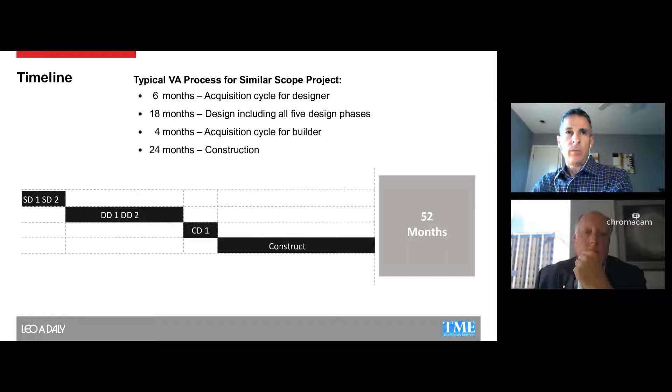So 6 months for the acquisition of the designer, 18 months of design, and then we had 4 months for selection of builder and 24 months of construction. And the actual length for the Omaha project, the donor went through a selection process for the designers, and shortly thereafter went for an acquisition process for the contractor.

So our contractor, this is actually a CM at risk type setup for this project. McCarthy Building Companies was the contractor, and they actually performed more like an early contractor involvement, so they were involved throughout the length of the project from early design all the way through to the end. That allowed for a lot of control of budget, scoping of project, and the potential to get some of the specialty subcontractors on board early. We'll talk about that a little bit.

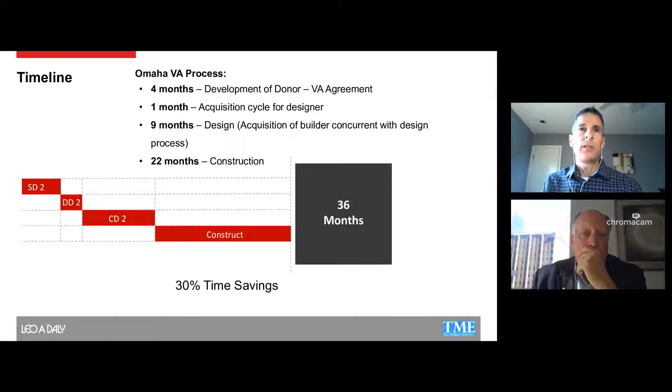Ultimately, that looked at about 30% savings of time overall. So when you look at this project, people are wondering how it fared from a budget standpoint. The reality is it really became a matter of the overall schedule. When we look at that timeline and the primary benefits that contributed to it, we were able to get started early. The elimination of multiple submission points reduced the overall design time, and the involvement of the contractor allowed us to have coordination with specialty subcontractors.

They were not just a straight bid to lowest bidder type situation. We worked with specialty contractors and had some delegated design items. So that early contractor involvement really allowed for constructability reviews, timing, early procurement of items, which ultimately impacted the overall schedule.

The senior resident engineer for the project from the VA was involved in the project during design, so when you were going from design to construction, that senior resident engineer was involved in the project and knew the decision-making process throughout.

So the end result of really controlling that timeline - although there were decisions relative to design that controlled cost - the actual construction cost of this project was $67 million versus an original budget from VA for this project of $86 million. And when there was a conceptual estimate done by McCarthy between program and concept, they set a number just at right below 67. So we ended up being within 1% of the conceptual estimate when we were done.

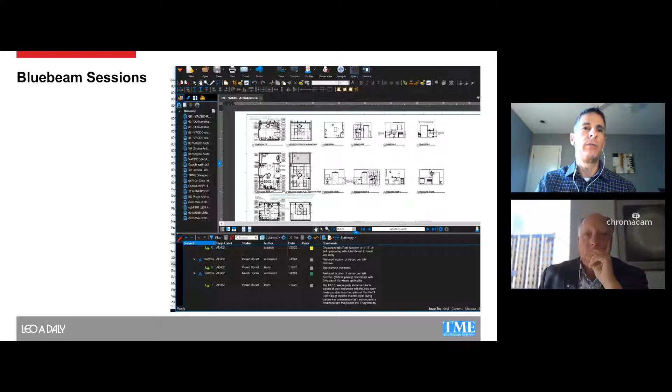At the end of that period, it closed for comments, and as a design team we could generate a report to all reviewers showing the comments and how they were addressed. This was done for each of the primary milestones. We ended up needing a training session with the VA reviewers at the beginning, but since then we've talked with central office VA staff, and the VA is moving towards using this as their primary review tool going forward.

Regarding FGI and VA TIL, I mentioned earlier there was a modification or evaluation of which provided benefit. At the beginning of the project, in addition to modifications to the PG 1815, there was an establishment of the primary codes to be followed, including evaluation of which VA design manuals would apply. For this Omaha project, most VA manuals, other than those for surgery related to med gases and similar systems, were not followed. Instead, typical NFPA guidelines, local building codes, and FGI guidelines in conjunction with VA TIL for room templates, equipment layouts, and room organization were used.

That allowed us as a design team to evaluate with users whether, for a particular room, there was a reason to look at a different setup than a typical VA TIL room, giving us the latitude to do that. That doesn't mean we didn't follow VA TIL requirements—I'd say about 90% of rooms followed typical VA templates. But in some cases, like the women's clinic, they wanted things set up a little differently. So those rooms meet FGI guideline requirements but are not a typical VA TIL template, for example for a women's exam room.

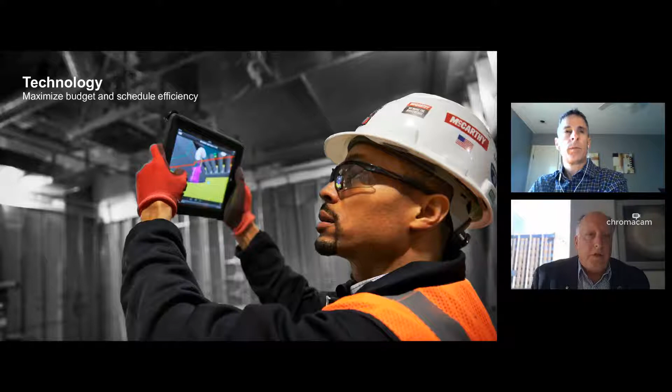So we're going to talk about learning objective 4. We're going to introduce some of the technology used on this project to explore some of the unique aspects of design and construction, but also focus on how the technology had an important positive impact on the budget and schedule. Unfortunately, we don't have McCarthy Construction with us today, but they are the contractor for the project, as Jeff mentioned, and a great partner to the whole project team. A big advantage for this project was that the private sector donors brought McCarthy on for early contractor involvement.

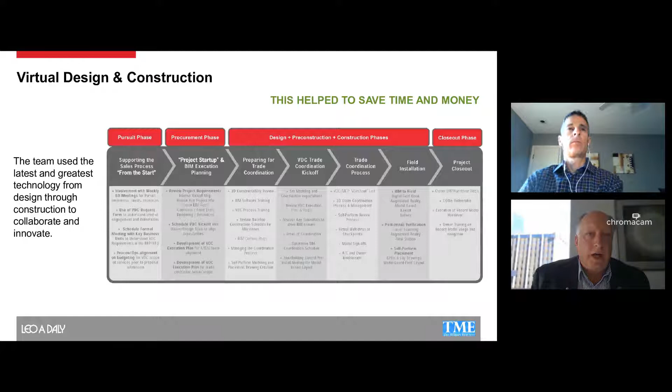That occurred almost immediately after we were hired as the design firm. The ability to get their input during the design process was invaluable for producing an effective set of design documents, while also staying laser focused on the budget and schedule for the project.

One of the things that helped from the start was that we gave McCarthy access to our Revit model, so they could keep abreast of our design progress. Significantly, they were able to do real-time cost modeling based on the Revit model as it was developed and updated day by day. We in turn used our clash detection from the Revit model, and even virtual reality software, to help avoid conflicts of building systems and so forth.

Another benefit of McCarthy having access to our Revit model is that they could do constructability reviews at any given point in time and always have the most recent design documents at their fingertips. This allowed the team to make effective design decisions based on immediate feedback from McCarthy.

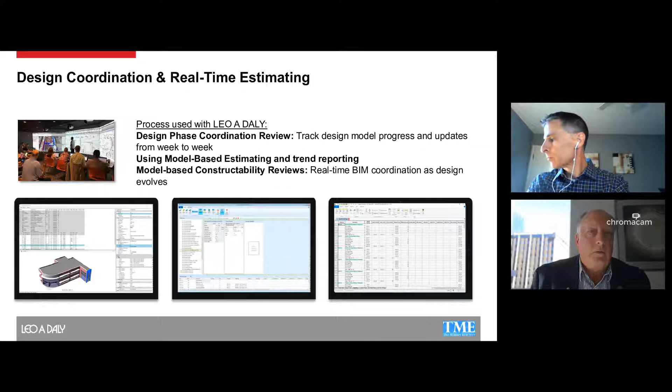Another great piece of technology McCarthy employed was their subsurface utility mapping system. I'm pretty confident no one on this call has ever gotten a set of as-built drawings that were 100% accurate. With a facility dating back to 1950, you're aware there may be surprises along the way. The subsurface utility mapping identified several unmarked utility lines on site, even a buried manhole we would have otherwise been unaware of.

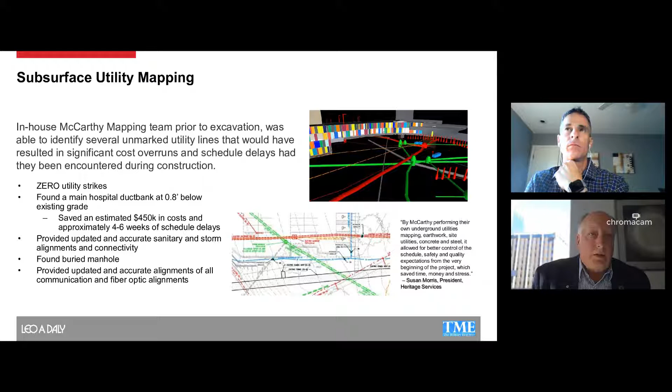Luckily, their process even identified an electrical duct bank less than a foot below the surface. We estimate this essentially saved about $450,000 and at least a month on the schedule by not finding this unmarked duct bank the old-fashioned way.

Another benefit of McCarthy having access to our Revit model is they could do constructability reviews at any given point in time and have the most recent design documents at their fingertips. This also allowed them to coordinate the work with all the trades in a 3D model. Their team utilized drones, laser scanning, and of course the virtual reality tool our team used to help walk the VA clients through the space.

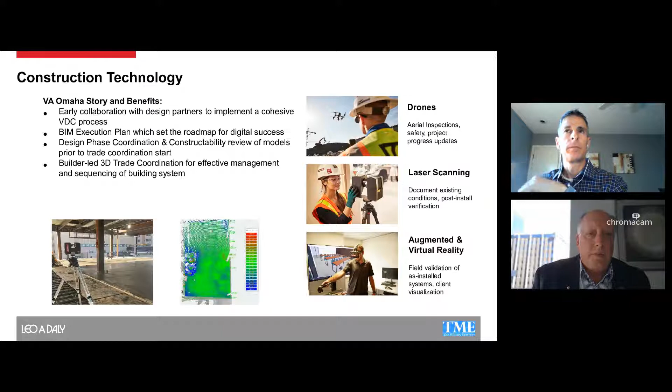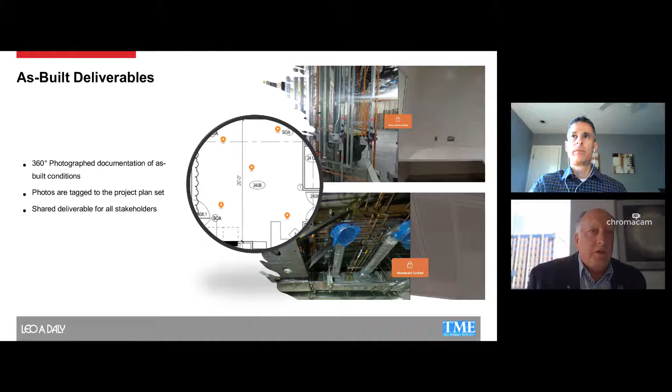There's a question about whether the VA has used the chip-in program elsewhere. When the chip-in project was conceived, it was set up to allow 5 projects under that legislation, and it had a sunset date. Omaha was the only project executed during that period, though the sunset date was later extended. There's a project in Tulsa right now, a renovation of an office building into a hospital for the VA, which will be the second chip-in project. I believe they're looking at extending that further. I think just recently it was approved to extend the Chip-In Act, about 2 days ago, by the House. It still needed to be voted on by the Senate, I believe, because other entities are looking at potential projects there. But of the initial 5 envisioned, Omaha was the only one executed under that initial legislation.

In terms of veteran-owned business contracts, on the design side we were the one consultant hired, along with landscape design; there wasn't a requirement there. I know under subcontracts for construction, there were some veteran-owned small business entities involved with the project, though I don't know what the construction requirements were, honestly, off the top of my head.

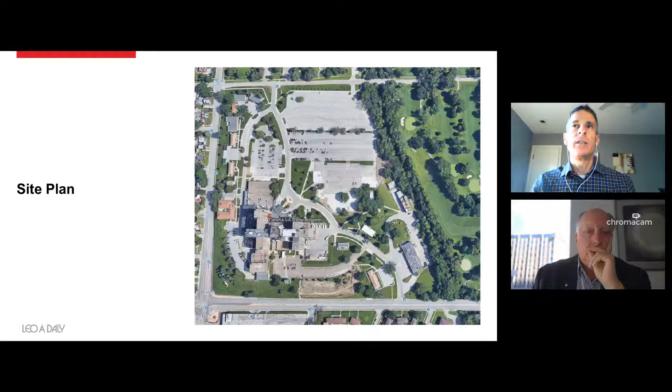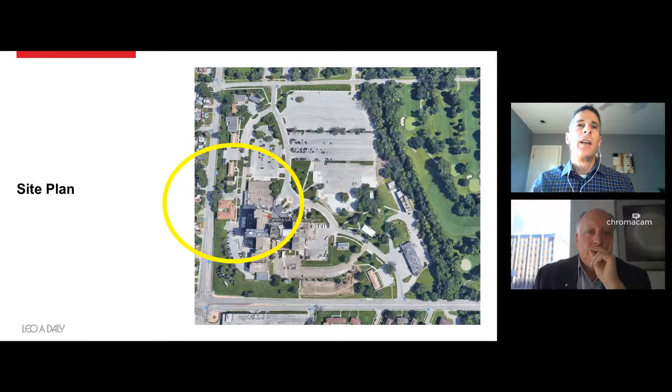The VA hospital building is over here, and the parking lot to the right of that is where this building is going to reside. So this is a site plan and footprint of the new building. It was designed to be kind of the front door for the overall campus.

There's parking associated with that, and there's a separate project the VA just recently completed, a parking garage to the north of this. It was designed to have a connector back to the main hospital, and it's a split connector, so there's a public concourse connector as well as a service corridor connector.

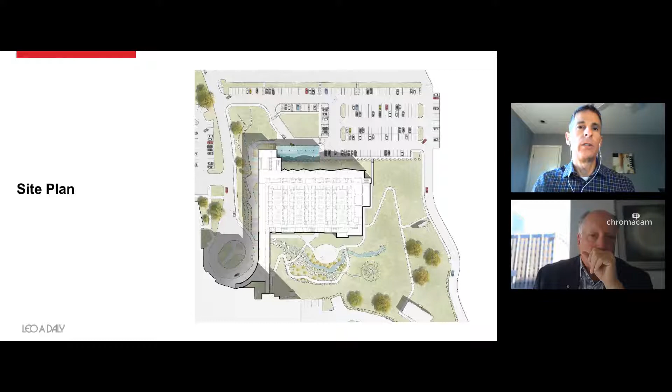The position of this building allowed for connection to parking. It also avoided certain utilities and things in that back area, but it did create some distance back to the hospital. So that comes into play for what the development of that experience was like for the public to actually access the hospital, because this really became the front door for people accessing the campus.

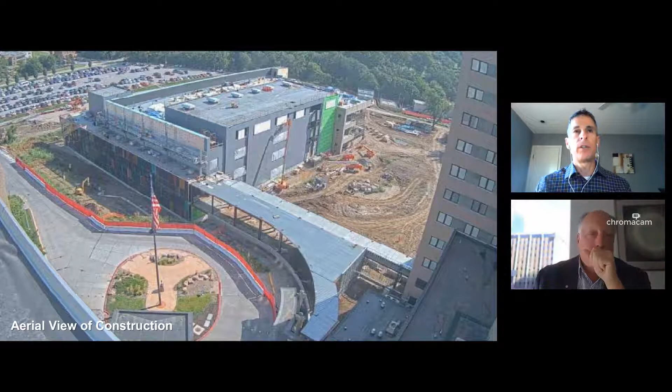Rather than this drive up here that you see in the lower corner, that is the main entry drop-off drive for the hospital. That remained in place through all of construction, and it still is the main drop-off for the hospital. Nearly all the functions in this ambulatory care building are functions that came from the hospital.

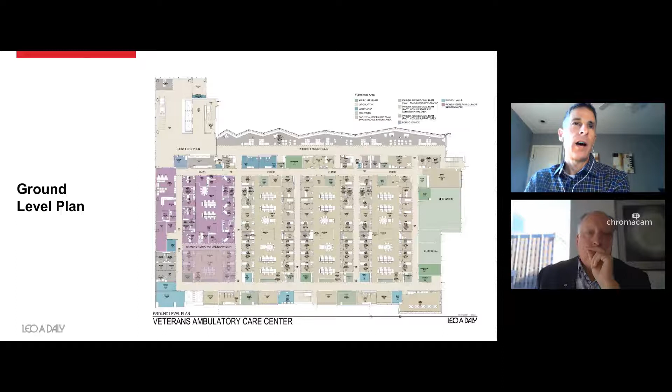So this is the ground level. It is the entry level for this building. In the upper left corner there is an entry lobby area, and elevators and stairs. This building is set up very simply. To the north you'll see that crinkle wall there, we've referred to that as the flag wall, which you'll see in some of the images. All the waiting areas for the 3 floors are against that wall.

And then the clinics, the PACT module clinics, are set up on ground and 1. Very systematic, very clear. The wayfinding and access to these are very clear, as opposed to most of these came from the hospital, where they would all be in different configurations, on different floors. So this became a very systematic orientation for how veterans were to access all these places.

The purple module at the far left is the women's clinic, which was not originally part of the scope of this project. Through design, the donor really wanted to push for that, and we were able to incorporate that under the scope of the project and the budget. So there's a women's specialty clinic there, and then the rest of that floor is general primary care clinics.

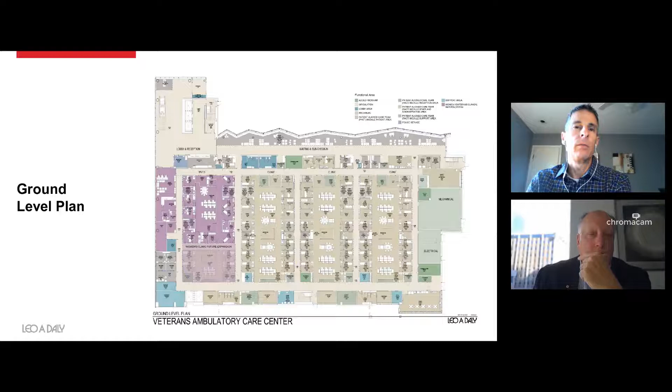Same thing on level 1. This is the concourse connection. So when you come up the primary entry stairs, this concourse connects all the way back to the hospital.

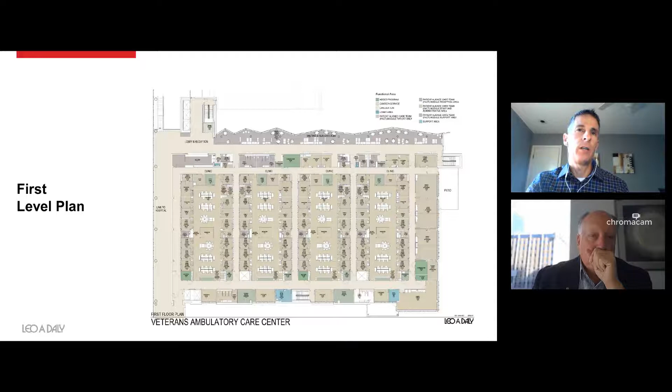It is in a split corridor, so you have a service side and a public side. There are service elevators on the lower left here on the back. This building very much operates in an on-stage, off-stage approach, where all your patients feed from the north side. There's patient corridors, and then there's a service back corridor and service access to all the clinics for the staff.

The top floor of this building is a specialty care clinic, and then the rest of the floor has radiology and an ambulatory surgery center. So you can see the operating rooms on the far right side. Prep recovery zone is in the middle of that floor.

And then that back corridor to the south of this drawing, the bottom of this drawing, is your service corridor that connects to those service elevators so we have the ability to get supplies to surgery. The connector back to the hospital is designed to be able to house a second floor, should this floor be something that wants to connect all the way back to the hospital in the future.

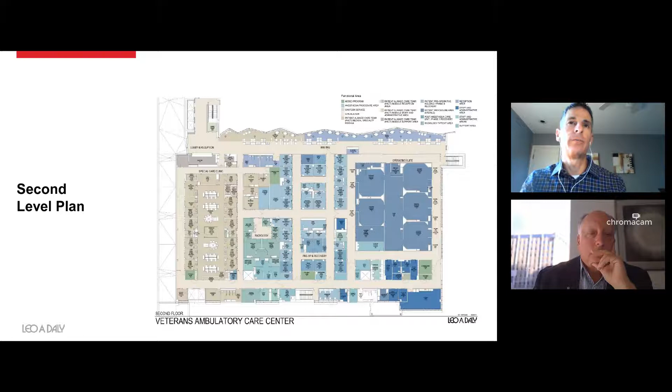So from a design standpoint, rather than planning, there are 3 primary drivers for the design of this project. We developed these through design charrettes in our office, and with veteran employees that we have. We asked people, what do you think of when you think of veterans? What do you think when you think of the VA? And we synthesized that down to a few comments.

We had meetings with the donor group, with the VA, to present some of our ideas, get their input, involve them in the decision making, and it really came down to 3 specific ideas: freedom and sacrifice, duty, and honor. We had 3 specific design elements in this project that were executed throughout to really support those as the primary design ideas behind the project.

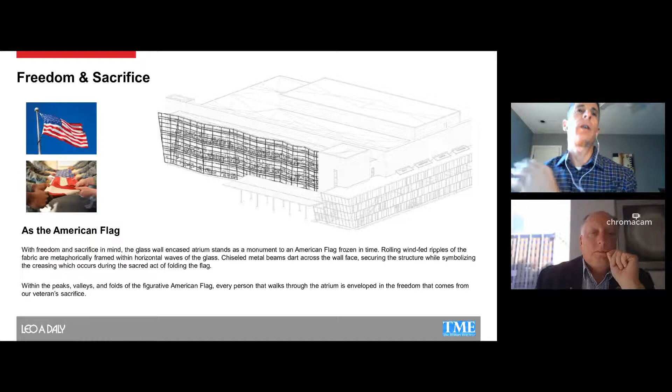The idea of freedom and sacrifice was represented by what we've called on this project the flag wall, which is the north curtain wall that is against all of the waiting room spaces. It's meant to represent an American flag frozen in the breeze, with the mast on the right where you get tighter crinkles, and it gets out to the far left in this drawing, which is to the east, where you have kind of wider waves.

So when the building is lit, the actual floors and the lit space start to represent the stripes that are on the flag, obviously metaphorically, but this element became a very strong element in terms of dictating imagery in the project.

This wall still needed to meet all the blast requirements of VA projects. So we worked with a specialty sub-consultant curtain wall manufacturer to develop this. We had a concept for this, and they helped work through, with our engineers, the design details to execute this wall. I think having a specialty subcontractor on during the course of the project was huge in making sure it actually could be implemented.

Duty is represented by a stone wall that runs the length of the project, separating the public spaces from the clinic area. This is meant to represent the dirt on the ground that soldiers experience when they're in different parts of the world, how that dirt is then tracked back to our local areas. As our veterans from Nebraska and Western Iowa come home, we have a very agrarian nature to lifestyles here, and a lot of them have agricultural backgrounds.

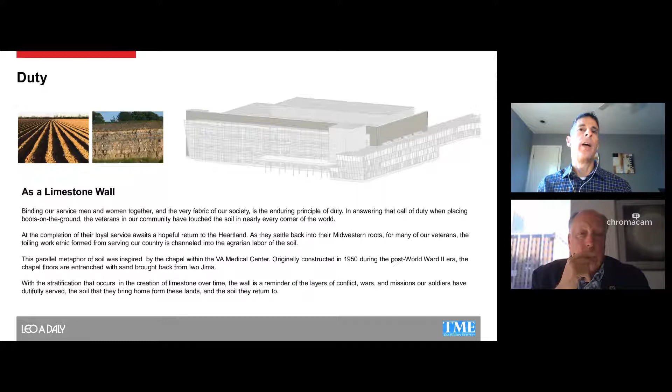So that connection of dirt and soils from across the world coming back to where veterans are coming home is represented by this wall, and its execution throughout the building tries to emulate the layers of how different layers are created in the earth. It represents that kind of safety separation between the public areas and the clinical parts of the project. You can see it runs down the concourse, as well as all the waiting areas, separating public waiting from clinical areas.

And then the last idea of honor was represented by the ribbon racks on service members' uniforms, and the execution of that as a design element on this project became the stained glass windows that are part of the connecting concourse. That's really the primary entry to the building, and then the experience as patients and visitors are walking back to the hospital.

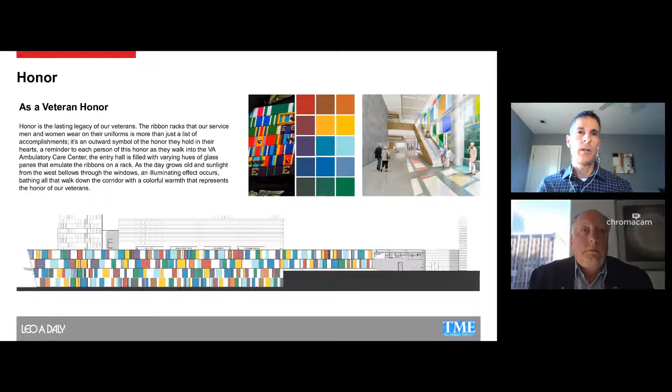Obviously, during day versus night, it creates a different effect. It's probably more eminent from the outside at night, but during the day, one of the issues with this became that the concourse really has a different experience as the sun moves across the sky and at different times of year. We have almost 300 feet of connector between this main entrance and back to the hospital, so there was really an emphasis on trying to make sure that space had an experience in it. This colored glass will help to implement some of that.

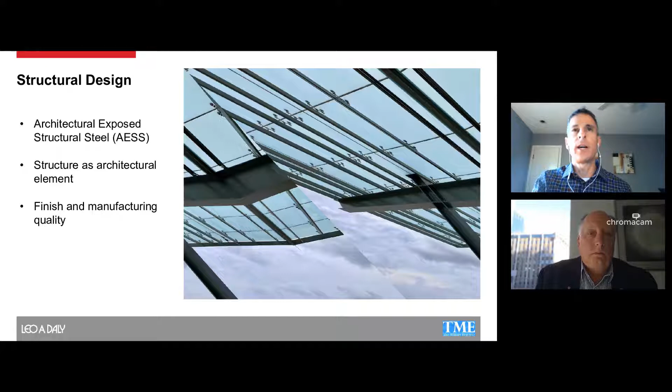The front entry canopy was designed with architecturally exposed structural steel, so that became a big element in terms of what that piece actually looked like. We had worked with a contractor to get very clear, very clean connections on that, so that piece was done very well, since it is something the general public interacts with when they come in. Looks like that photo might be a little bit messed up.

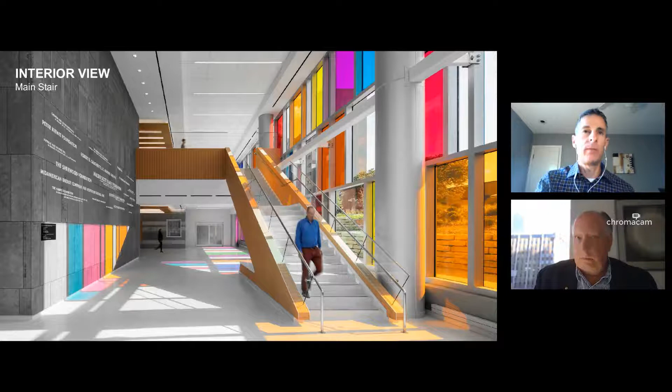Some of the interior photography, that main lobby, you can see as the sun comes across and rakes across that stained glass, what the impact of some of that is. The actual opening of the glass on the floor actually crawls across the space and climbs up the wall, and we'll have a video a little later that you'll be able to see that.

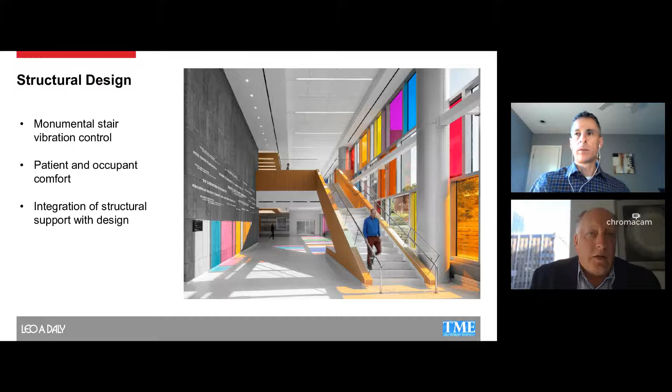So you've already seen some of the interesting structural design elements, like the flag wall, the north curtain wall Jeff showed you. One of our focuses was trying to integrate design and engineering together pretty flawlessly, and not have obnoxious engineering features standing out. One structural element that goes really unnoticed is a support we had behind the monumental stair. We put a support there to eliminate vibration, so that when veterans utilize these stairs, they have a greater sense of stability and security. That support was integrated into the design, so it's essentially unnoticeable.

So a couple of the interior views, there was an emphasis on trying to make sure that wayfinding for this project was very clear. So there's a patient check-in area that is consistent on every level. When veterans come off the elevator or off the main stair, they're on the floor, and the first thing they're encountering is this patient check-in space. Then there's regularly spaced check-out spaces that are at all of the exit and entries to the clinics as well.

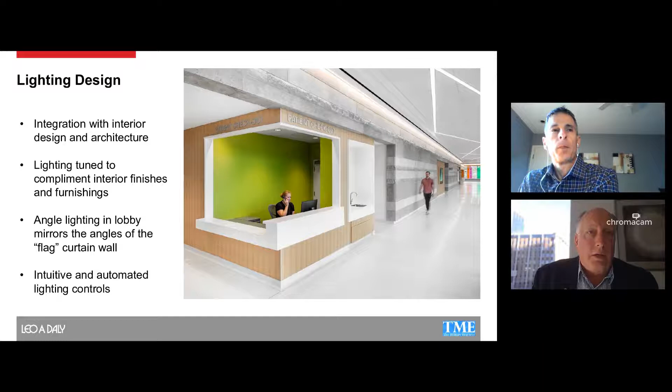One of the things, again, and this goes to integrating the engineering with the architecture - we are honored to have recently received a Global Award of Merit from the Illuminating Engineering Society for the lighting design in this facility. The lighting was designed to integrate into the interior design as well as the overall architecture of the building. In this image, you can see the angled lighting in the ceiling space, and that mirrors the angles of the signature flag wall that we've been talking about. There's also strategic placement of wall washers, recessed linear slot lights, use of direct and indirect lighting, all designed with a purpose, not only to provide a comfortable space for the veterans and their families, but also to assist in the overall wayfinding and building orientation. We also incorporated some automatic controls that sense the passage of time through the day, and we're gonna talk about that in a couple slides here.

As I just mentioned, we incorporated a protocol of automated lighting controls with color temperatures in the clinic. Those familiar with the VA's PACT model know there's a strong desire for staff in those team work areas to have natural daylight available. Although the back of the team areas allow natural light to filter through the south end of the building, it was important to have a balanced sense of daylight throughout the entire work area. The lighting system employs automated controls and color temperatures to give a passage of time through the workspace so it truly emulates actual daylight patterns. We also reduced after-hours lighting to create a nighttime presence, which Jeff showed before in some of those images, and to enhance security. In the end, it helped the building meet energy criteria for LEED Silver as well.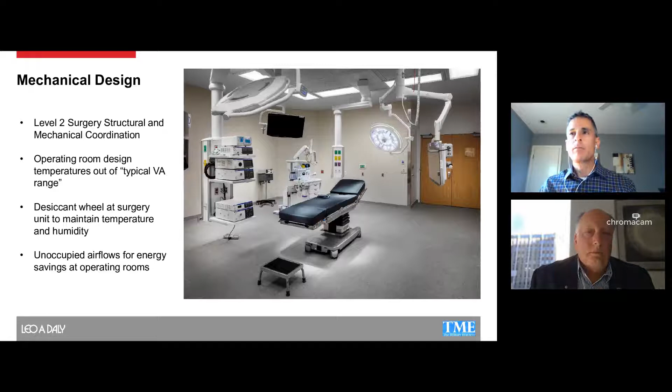I know there's a question Mark submitted about defining the donor and who the donors for this project were, so I'm going to take a second to address that. The technical donor for this project—there was a 501 LLC set up, the Veterans Ambulatory Care Development Corporation. Basically, the primary donor was Heritage Services in Omaha, which is a group of philanthropists that regularly support community development projects in Omaha personally. They've developed money for the baseball stadium where the College World Series is played, which a lot of you are probably familiar with. They've done the Holland Performing Arts Center, a number of community beneficial projects. They were very much behind this as a way to support the veterans from the community here in Omaha and Western Iowa, and they were really the driver, in conjunction with our legislators, to get this project done. They were the money behind the donor for the project.

Jeff showed you before the space between the existing hospital and the new ambulatory care center. There was nothing in the original scope of work involving that 200 feet or so of space. During the design period, as it went along, the donors started having discussions about contributing additional money separately, outside of this project, to create something special in this area. But as we went through the design and McCarthy was putting their cost together, there were enough cost efficiencies realized in other areas of the project that we were able to incorporate this garden area into the project and still stay within the original established budget.

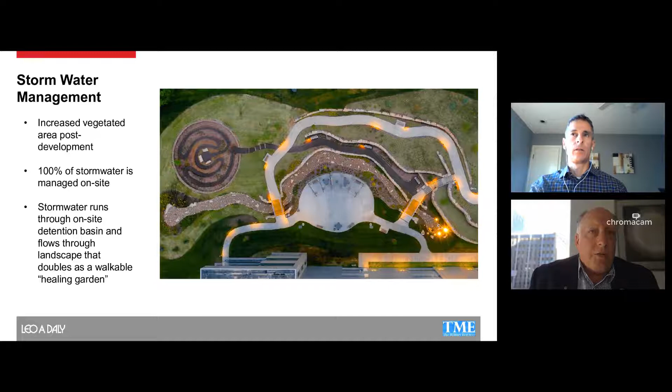This is a view of the garden area from the east looking west, looking down through that 200-foot gap between the buildings. One thing to notice here is the grade change Jeff described. The high point on the site is where the existing facility is, and everything slopes away to the north and to the east. So we're able to use that garden area as a nice transition of space and of grade.